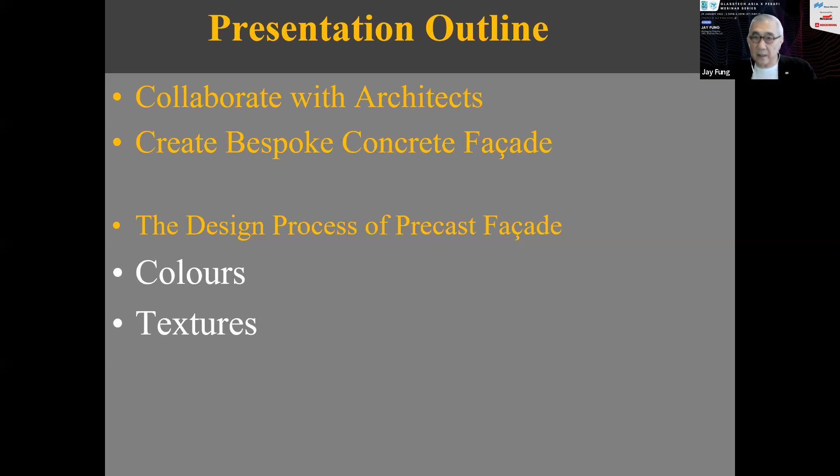Now, very briefly, I will explain the process that I went through in collaborating with the architects and the outcome of this precast concrete facade that is bespoke, and also many of them are iconic. And of course the process that I went through in developing these precast facade panels, and we are focusing on three primary issues. They are the colors of the precast concrete facade, and then the textures. Texture meaning whether they are smooth or rough, or half smooth and half rough, and so on. And of course there is the profile. That means the shape or the form of the concrete panel facade.

I've chosen three projects to share with you. The first one is the Troika. It's a condominium project in Kuala Lumpur, Malaysia, designed by Norman Foster and Partners with the local architect GDP. The second project is in Singapore, the new State Courts, designed by a firm based in UK called Serie, in collaboration with the local architects Multiply and CPG. And the third one, the Hive, in NTU, Nanyang Technological University in Singapore, designed by Thomas Heatherwick of Heatherwick Studio.

And this happens to be, I understand, one of the favorite projects of Timothy. So he makes sure that I focus on this job. So I'll try to do that.

Now, the first job is the Troika in KL. It is a condominium project consisting of 3 towers, each one about 40 to 50 stories high. And our work is used at the shear walls, the black walls here, that you can see from your bedroom. When you sleep, you are next to it, or you can see them in your living room or in the balcony, and also from a distance.

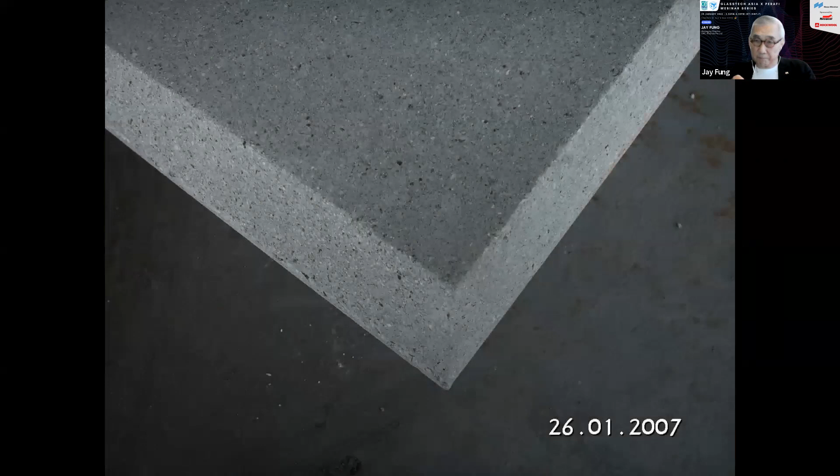Now, this is what one of the panels looks like. It's a precast concrete panel. The natural concrete, there is no paint, there is no skim coat, there is no plastering. This is the honest expression of the concrete. But how we can do this is not so easy. You have to be very clean, and the color has to be very uniform to meet Norman Foster's requirement. I'll try to explain that in the next few slides.

In order to make sure that the color is consistent, because we're not painting the panels, all the raw material has to come from the same source. For instance, the granite aggregates had to come from the same source. You can't use granite from this quarry today and then the next batch from another quarry, because a different material such as the granite or the cement or the sand will alter the color of the concrete panels.

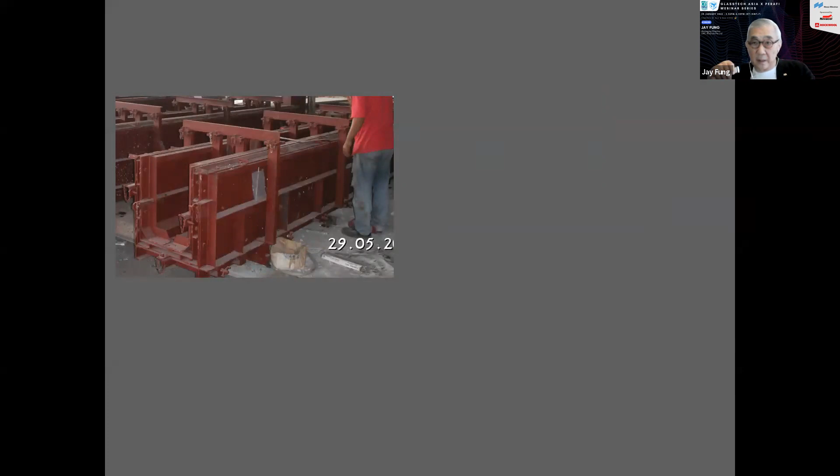And to make the panels, we have the mold. In this case, for this panel, the mold size is 1 meter by 3 meters. And we pour the concrete after we have chosen all the mixes. And then there is a U-shaped panel that is done in this mold. It's made of steel. And these are the panels that are cast from the steel mold. You can see the U-shaped panel on the end, and then the flat panels in the center.

What I want to highlight is that Norman Foster had a very strict requirement on the color, and on the uniformity of the texture. Color-wise, he doesn't allow any black mark, which is natural in concrete, such as an effect like marble. He doesn't allow that. So if you have a black blotch that is bigger than a 50-cent coin, that will be rejected.

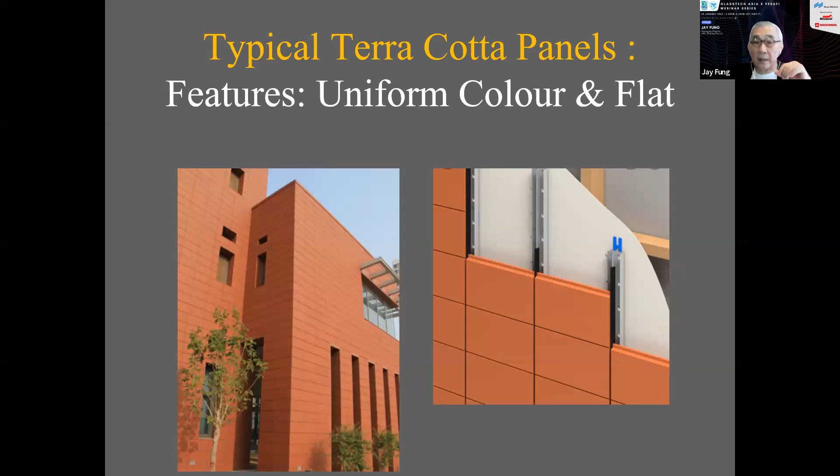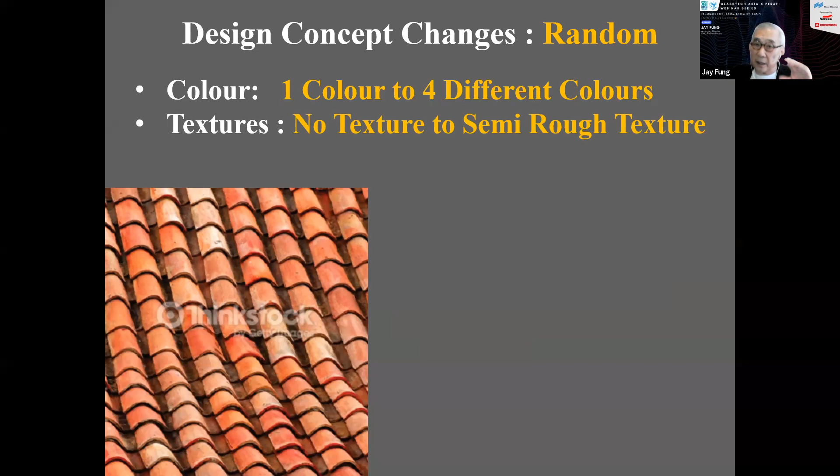So the color has to be 4 different colors, and the texture will be slightly rough. And the profile, meaning the ins and outs, those groove lines have gone from one width to 6 different groove line widths. So when you combine them, it'll be all very random. And throughout the building, they're different. He wanted a different color scheme for different floors. They had chosen 4 different main colors.

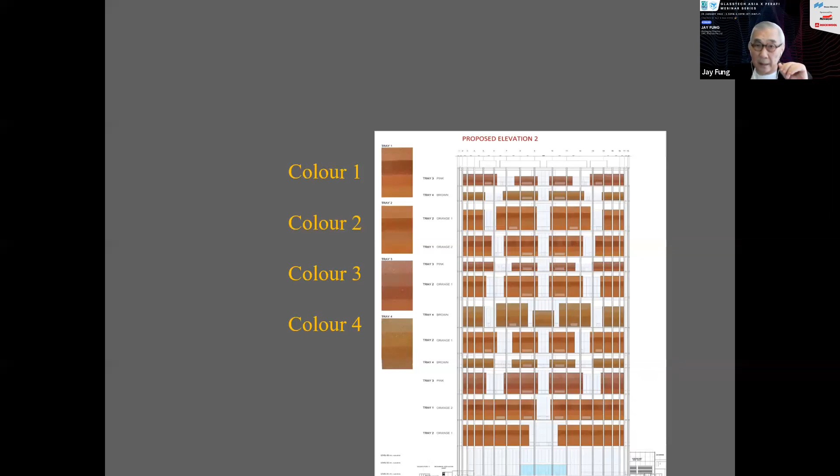For the terracotta, you can see them here. Color 1, 2, 3, 4, and each one of the terracotta colors will consist of 4 different shades of the same color. So altogether, there are 16 shades that we need to do. And it gets to be quite complicated. As you can see, we have to do lots and lots of these small samples for him to choose.

And Chris Lee is based in London, so we have to Skype. This is before COVID and before Zoom. And sometimes we have to use our handphones to take photos and share them. But we soon came to realize iPhone and Samsung phones have different colors, so we all agreed to use only Samsung phones when we share the color, so we can see the same and discuss the color more accurately, because we're talking about very fine distinctions among all the shades of the terracottas.

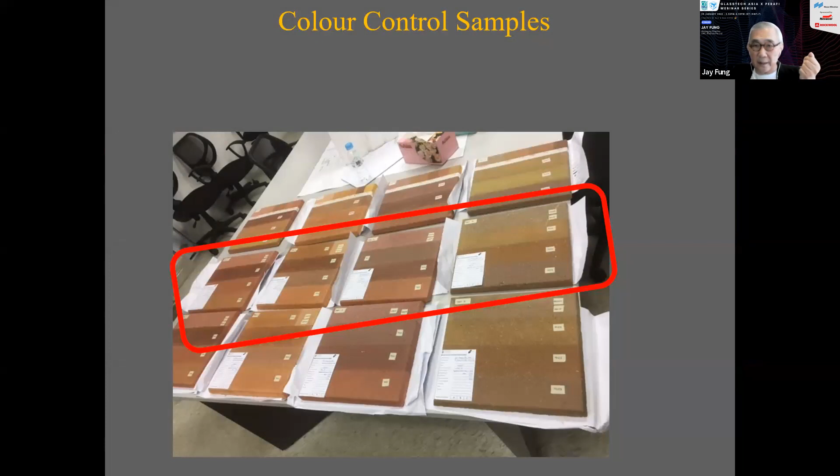And after all these panels that we have cast, we have to do 3 sets of these control samples, 1 to be kept by the main contractor, 1 by us, and 1 by the architect.

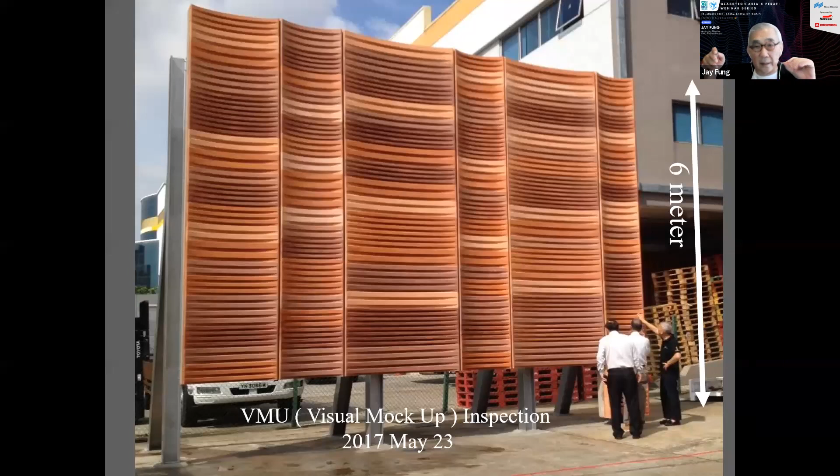And the panels come in 3 widths. The widest one is 1.8 meters, then there's a 1.2 meter wide, and then there's the 900 millimeter wide.

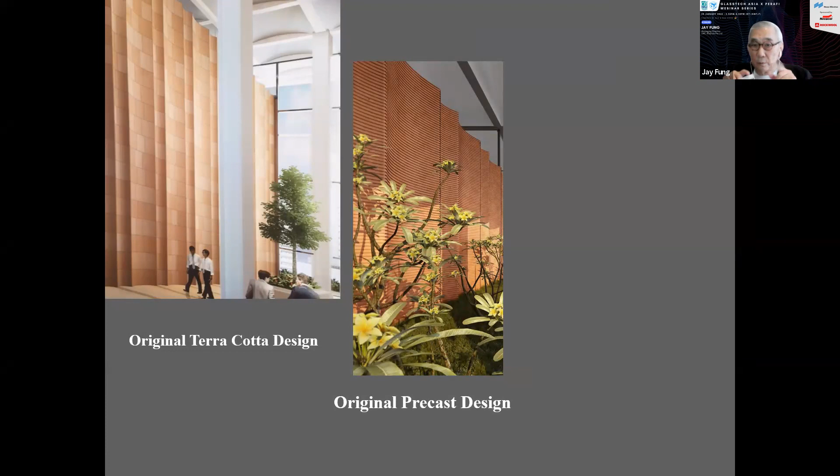So we were able to change from the original terracotta design, a uniform red color, a single color, single groove line precast, to something that is very random and very interesting. And all these design upgrades were done after we got the job. And recently, this project has won an award.

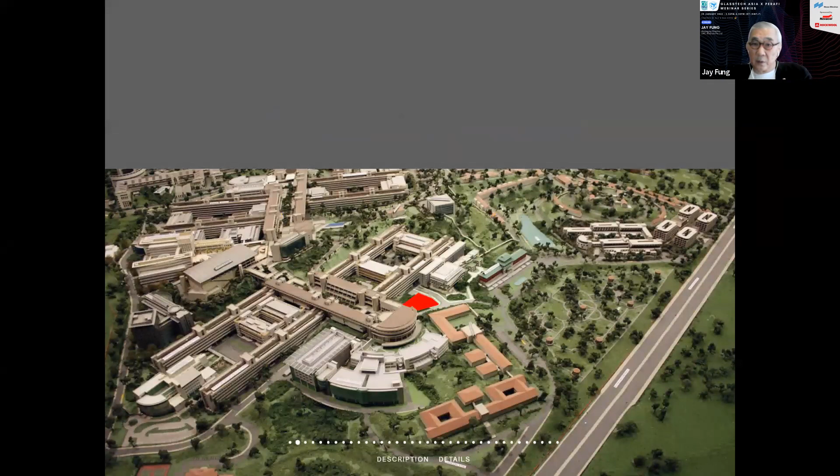Now, before I get to the facade design, the precast design, because this project is so interesting, not just on the facade but also on the layout, the form and the interior, I'd like to spend a few minutes talking about some of the interesting features of this project. Many of these photos are taken from the website of the architect, such as this one. The red spot is the location of the building on campus, and the total build-up is about 14,000 square meters, at a cost of about 45 million Singapore dollars.

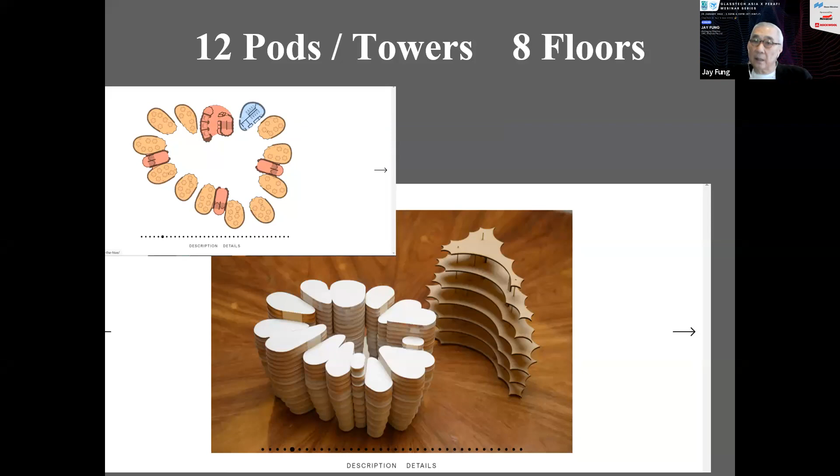Now, $45 million, I was told by the architect, is the cost of a car park structure in Singapore. So in other words, he was working with a very tight budget on this project. So everything that was done for this project, both interior and exterior, is all natural concrete, without any paint or additional claddings. The layout consists of 12 pods, like flower petals. There are 12 of them, and also 12 towers, each tower about 8 floors high.

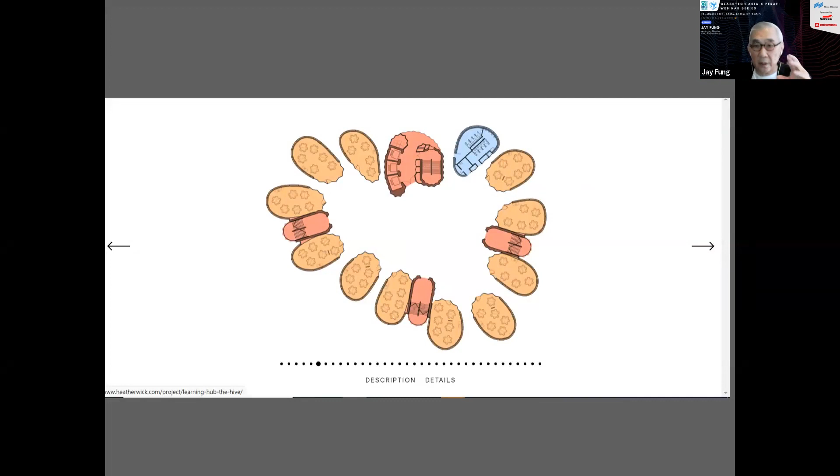In one of the talks by Thomas Heatherwick, he was explaining the concept of the layout. He said in a traditional school, you have a long and narrow corridor, and each room is a squarish room with a lecturer standing in the front and the students all sitting at the back. Now, in his design, he has made all the classrooms like flower-shaped petals, round, very irregular and very organic. This is the interior of the classroom. It's not squarish, it's round, and all the tables and chairs are movable. So there's no front and no back.

And the traditional blackboard is all around the wall of this classroom. The lecturer does not necessarily stand in the front, but she can be anywhere. So this is the new concept of learning, of classroom design. Another feature I heard in his lecture is that they have this corridor that connects all these pods, and the corridors are designed to allow and encourage interactions among the students.

And Thomas Heatherwick said in one of his talks that one of the ministers told him he would like the design to promote and increase the birth rate of Singapore. In other words, getting the boys and girls to meet along the corridor and so on. So, judging from the photos I can see online and all the wedding photos taken here and here, I think Thomas has done a very good job.

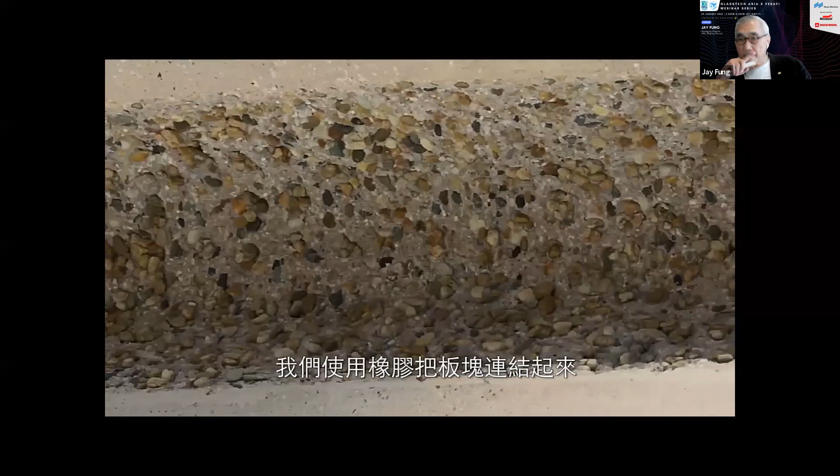Each of these panels is unique, and they were laid out with a series of pieces of rubber that were laid into the formwork. You'll see there's moments of shininess, real sort of roughness that comes about. What we're seeing here is one of the final panels, but you can imagine in getting to this kind of quality and surface, there were countless one-to-one mock-ups that were done to get the exact pigment, get the exact texture that they wanted to refine it.

Now, after I got a job, Thomas and I have changed the facade, and I'll share with you the process that we have gone through. We have changed the colors, we have changed the profile, and we also have changed the textures. Now, on the color, originally he liked something like this. Say, hey Jay, can you do this kind of Corten steel work? I said yes.

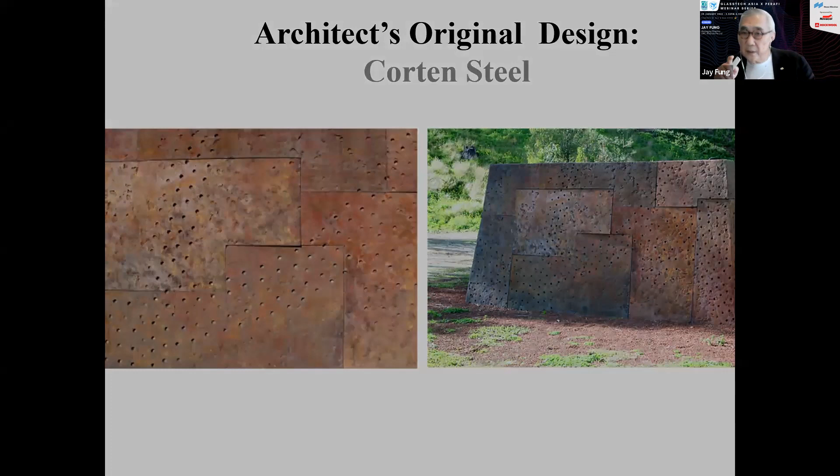So in his rendering, he actually got this design shown. But now, however, it looked like this. So I got my artist to Photoshop. Now how it became from this design to that, I will try to explain. Thomas saw a few samples that I did, and he liked these two. But he said, Jay, can you make this gray a bit more beige, the one on the left? Or can you make this beige a little bit more gray?

I said, sure. He comes to Singapore maybe once every month or once every 2 months. So I must get the color right. Each time I must get the design change right. Otherwise, the process would take a long time. Here you have the most gray, and here you have the most pink. And he chose the most pink. And this is the color that he's chosen.

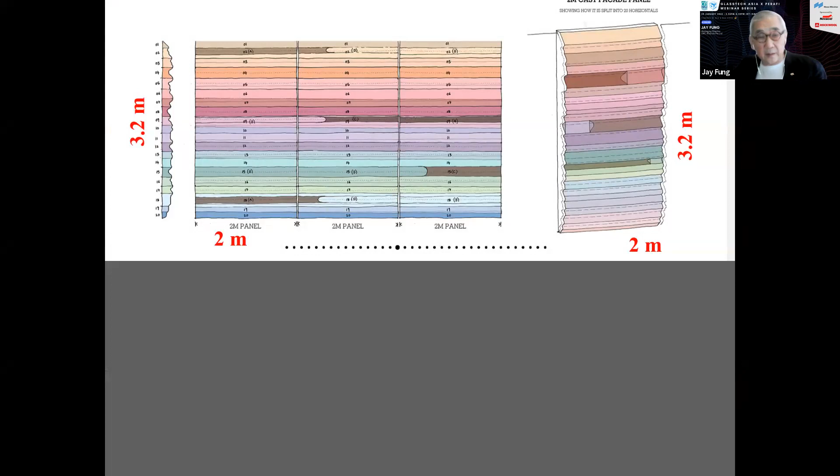Now, the profile, he sent me this photo. This is the job that he liked, the Perot Museum of Nature and Science in the US. He said, Jay, can you do this? He liked this. Every panel is unique. And all these joints, they are not vertical, they are sloped. I said, yes. So he changed his profile to something like this. It's all curvy, all wavy, and each one is about 3.2 meters tall and 2 meters wide.

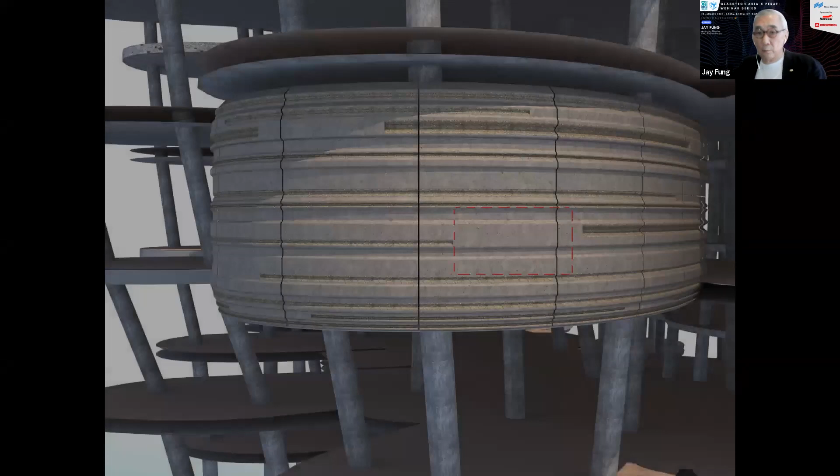Now the next thing is that we look at the textures. There are two different textures, rough and smooth, on each panel. The recessed, curved, darker part is the rough texture, and the lighter one is smooth. And then he sent me this rendering with this detail blow up. When I looked at this, I said, oh no, because you can see that the color here is quite random and looks like a stone, and it has all the pixels. Now, the ones that I did were very uniform. So from a distance, the one I showed him, which he approved, would look very flat, would look like paint. It wouldn't look like this.

So when I explained to him, next time over a cup of coffee, he said, Jay, this is what I want to do. He was sketching his design on this packet of sugar. So I pretended that I understood. And the next time he came, I showed him a lot of samples, some new, some from my factory done in the past. From that, I picked about 10 panels. I said, Thomas, if we were to combine all these panels, we probably can achieve the effect that you were looking for. So that's the color.

And then I'm trying to do these voids and holes like a natural travertine. How I did it was I stole this packet of Himalayan rock salt from my wife's kitchen. I pour this salt onto the mold, and I pour the concrete. After the concrete is dry, I wash with water to dissolve and remove all the rock salt. So I get these holes. Of course, for my actual project, I have to use garam kasar, which is a lot cheaper than the Himalayan rock salt that I used for the sample.

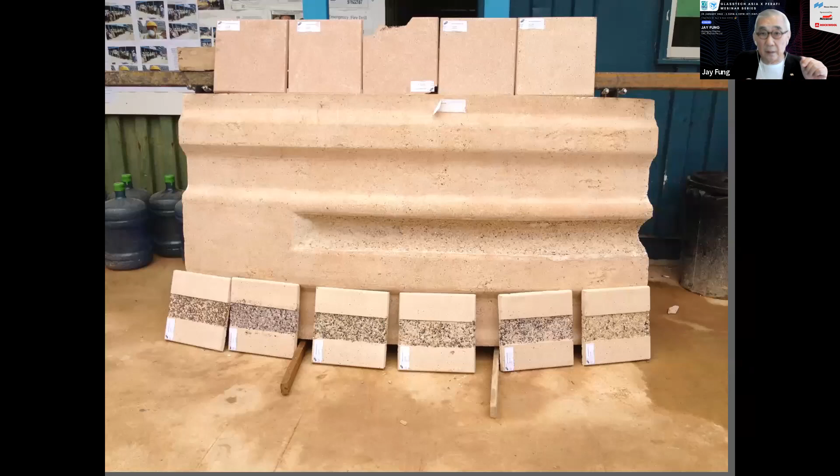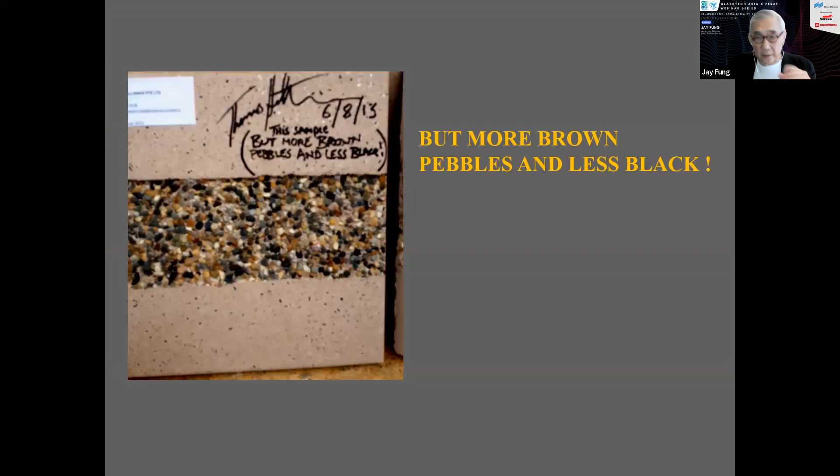And with that, we did all the small panels from lighter to darker, and then he chose the one that is most dark. And for the recessed part, the color and texture, he has chosen the one that is the most dark. But he has one more comment: more brown pebbles and less black. So with that, we were able to do the VMU, the first panel for him to review.

So he looked at it up close, and actually, when you come to look at it, the color is very similar to the image that he has shown me before. And then he stood from a distance and viewed it, and then he approved it, signed it off, and we have to produce them, and we install them by mobile crane. And this is the fixing method. You have 2 points that sit on the slab, and then you have 2 points that are held at the top for restraint.

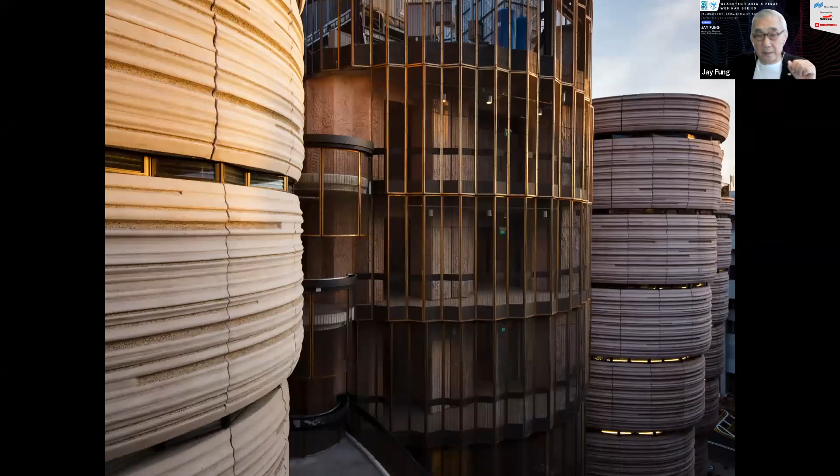And this is the finished project. What I wish to highlight is about 1,000 over pieces, and each piece is unique. Every panel is unique, and this makes our work very complicated. But because of this richness and combination, it makes this project very interesting. So here it is, the final project, the final photo of this project.

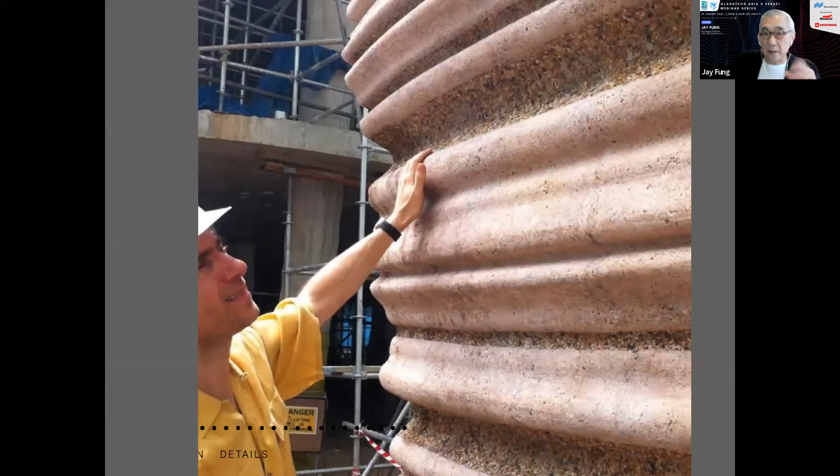I once asked Thomas, what is your favorite project? He said, oh, it's NTU. That was in 2015. He said, this is my first completed project. In the past, his projects were all bridges and the UK hall in the Expo. This is his first permanent project. But he said, I also like it because it looks like Japanese pottery. As you know, Thomas Heatherwick is not trained as an architect. He was trained as an artist. So he likes the handmade quality of this project.

And his work has been shown around the world, including here in Singapore and in the US. Proud to say that my panel sits right in front of the London bus that he has designed, right in the museum. So I'm very proud that my concrete panel is actually shown in the museum. And he also used this design for the book cover, and obviously he quite liked my work. So with this beautiful photo with the beautiful panels, I would like to end my talk. Thank you very much, and over to you, Sarah.

Thank you so much, Jay. Thank you for the wonderfully inspiring presentation. It has really opened our eyes to the vast possibilities in concrete. I think it was so interesting how you had to really think out of the box, like even use salt and baking soda. That was really cool. And hopefully all of us will now have more ideas in terms of how to integrate glass and metal with concrete. I hope we'll see more of that in the future as well. So in the interest of time, we're going to move on to our next speaker.

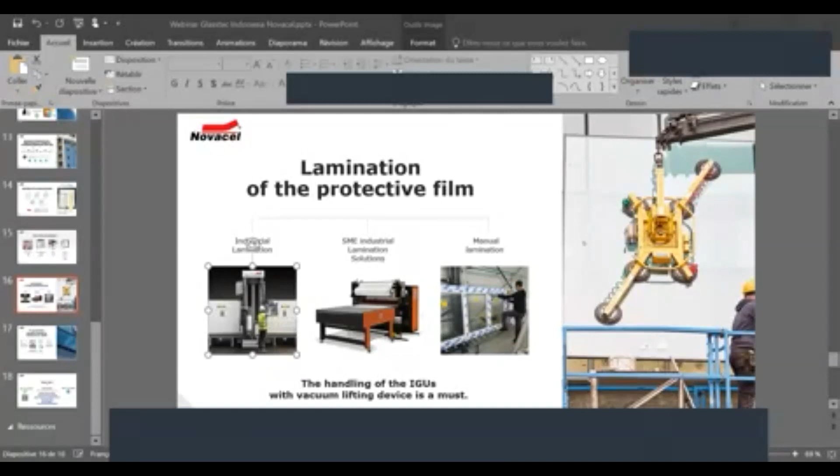We would like to welcome Ms. Sandrine Guibert, Head of Glass Market from Novacel, who will be speaking on the benefits of temporary protective film for glass facades. Ms. Sandrine has been working at Novacel since 2007, beginning as a marketing product manager. Today, she is the head of Glass Market with experience in developing protection solutions for the glass market and providing worldwide support for sales and customers. Sandrine is in charge of the development of green protection solutions for all surfaces, and she holds a diploma in chemistry and a master's diploma in business. Ms. Sandrine, please share with us your presentation.

Thank you, Sarah, for your introduction. Can you hear me clearly? Yes. Thank you. Let me share with you my presentation. One moment, please. Can you see my presentation clearly right now? Yes, there is a little box on the bottom. Still this little box. Is it better like this? It's on top. A moment, please.

All right, I think this is okay right now. The box is right in the middle. Okay, this is good. Yeah.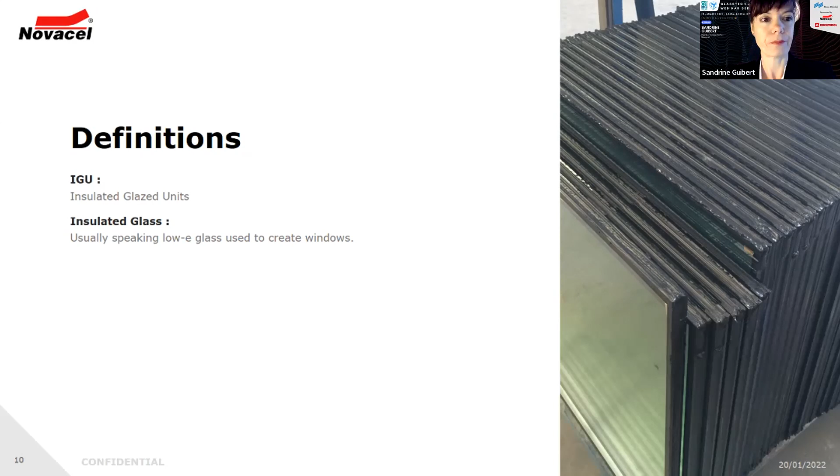The protection of IGUs can be done as soon as they are produced in the factory. Then the protected modules will be installed in the window profiles at the window manufacturers or directly on the facade. Windows are among the first elements installed in the new building, protecting it from the outdoor environment. For that reason, glass is very sensitive to damage during the remaining construction work, which may take months.

Protective film is an amazing shield against all types of environmental attacks that glass can face during the construction. For instance, cement projections, paint projections, silicone, grinding sparks, and more. Thanks to protection films, no more cleaning or replacing of IGUs is needed at the end at the construction site. No more late fees or penalties and no more disputes between glass installers and customers. Customers are more satisfied and returns are almost non-existent.

That's why building producers, architects, window manufacturers, IGU manufacturers are very interested in using this kind of product because it reduces construction time and enables them to deliver a clean building. Usually speaking, IGUs are protected in the factory by IGU producers at the end of the fabrication. Films can also be installed by window manufacturers, sometimes directly on site.

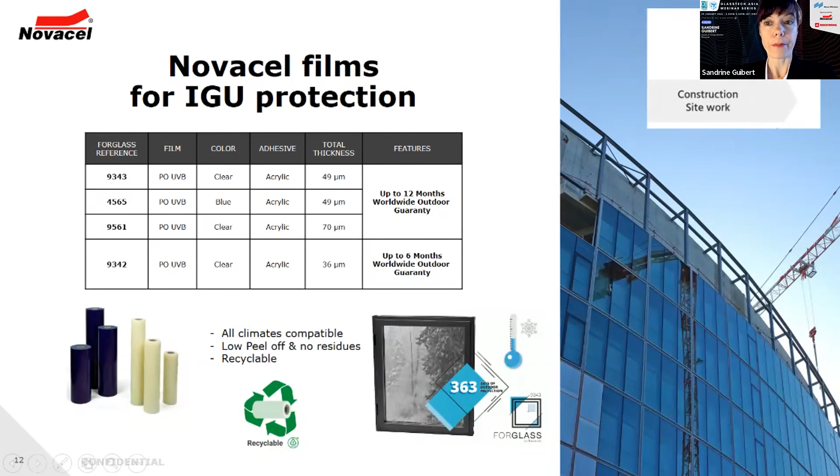To sum up, Novacel protective films are a safe solution to preserve insulating glazing all the way. Since films are installed from the beginning of the fabrication of the IGU, glass is protected all the way from the fabrication to the end of the construction work, going through assembly into the carpentry at the carpentry factory. They also sustain joinery installation and transportation. Our films are resistant to scratches, adhesives, cement, paint, and grinding injuries.

They are all climate compatible. They sustain warmth and humidity. They allow daylight penetration into the building. It's possible to use the same film for inside and outside use. No need to change the film. They can be removed from the surfaces easily without leaving any residues. And they can stay on the glass for 1 year.

So the benefits of protecting IGUs are numerous. Less replacement of damaged glazing at the end of the construction, fewer disputes between window installers or glass facades and customers. They allow considerable time and money savings, and they guarantee customer satisfaction. This is very, very important.

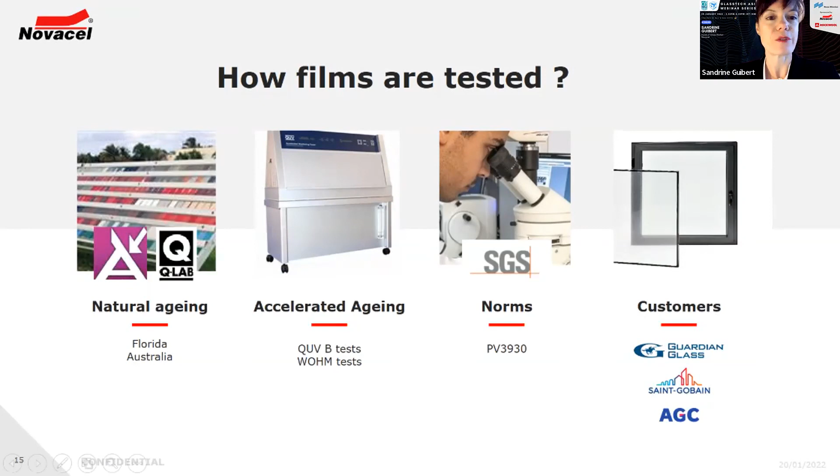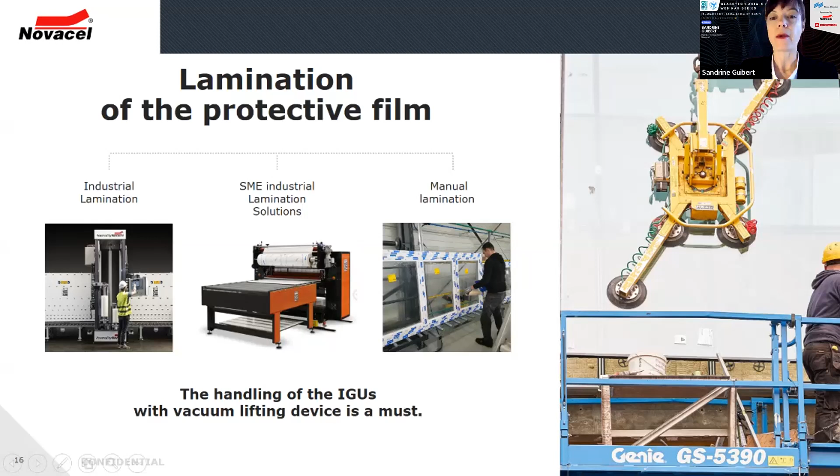And soon we will launch a new protective film made with 20% of recycled content for the protection of IGUs. This will belong to the Oxygen range, the new eco-responsible range from Novacel.

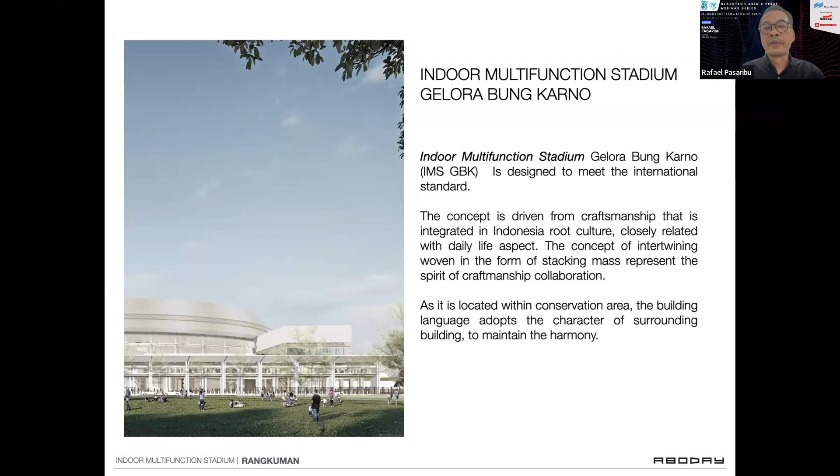What we have right now, the building will be on the northwest of the main stadium. We have a lot of facilities after the 18th Asian Games and the last renovations. But basically, this is the only structure that is allowed based on the consensus given by many stakeholders.

This is the first story plan. FIBA, as with other stadiums that are designed, usually has very strict zones. On the left side is services and also the parking area for the athletes, and the lower part where we see the orange color is for the public. It's an open plaza, where we have on the left and right escalators that lead people to the lobby and the second floor,

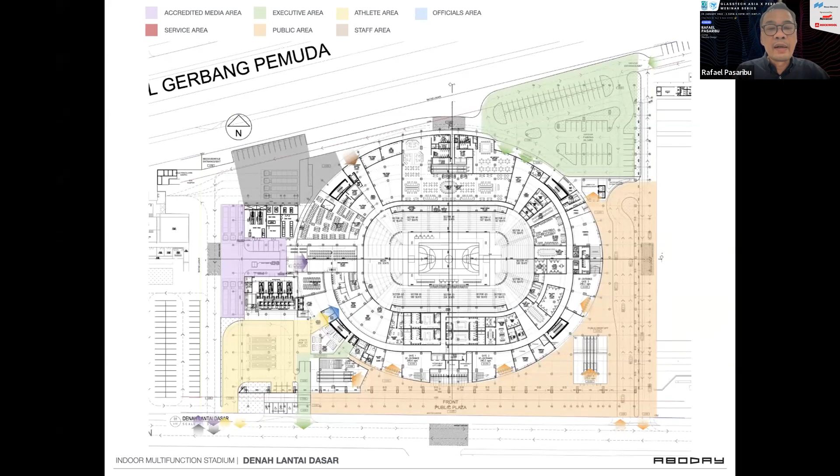and the green area is for the executive parking. Whatever event supporting facilities will be hosted at the ground floor, including the media, changing rooms, and so on, along with the official rooms and executive lounge. Inside, the red color represents the MEP equipment, and this is the supporting facilities for the playing field. We designed this with consideration that not only basketball is hosted, but also ice hockey and other indoor sports.

Second floor, where the tribune starts. Part of the tribune is accessed from the second floor, going into the first story, where it is retractable, telescopic seating. Others are a corridor at the perimeter ring, and from the corridors we enter the tribunes. We have two training fields on the left side, the commercial in blue on the right side, and the orange color is where the public will access the internal corridors.

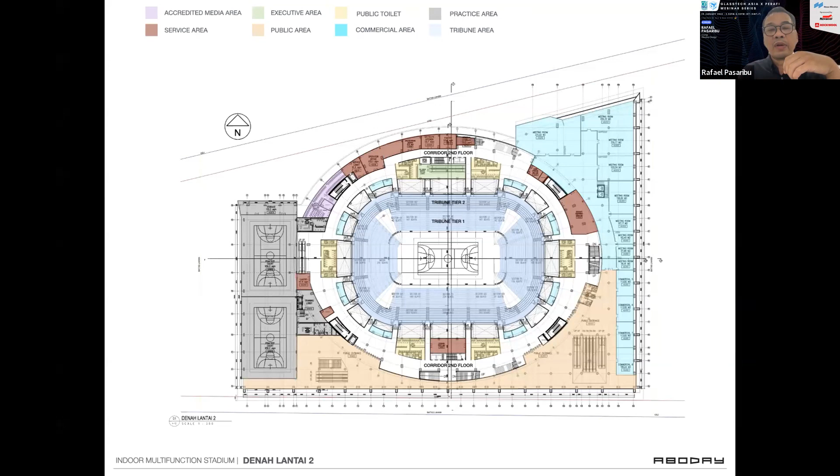From our ongoing discussion with the appointed consultants, there are some changes in this drawing to the lift core and the staircase core. This is the third floor, where we have the executive box. Executives, the presidents and so on, will stay on the third floor, and the circulation of the third floor will be isolated from public access as part of the requirements.

This is the fourth story, where we can see additional massings on the left and right that act as a place for MEP equipment. And this is the top, and the number of tribunes. This is the building from the north and south. The north facade will face the national broadcast television, and the south elevation we can see from the main stadium. They're two different things, because people will be coming from the south.

On the south elevation, the podium needs to tie back with the surrounding characters. And the top, we have two options for the finishes. One is aluminum panels, not aluminum composite panel, and the other is a stretch membrane, some of which come from brands like Serge Ferrari, a translucent material that allows vision from inside to outside.

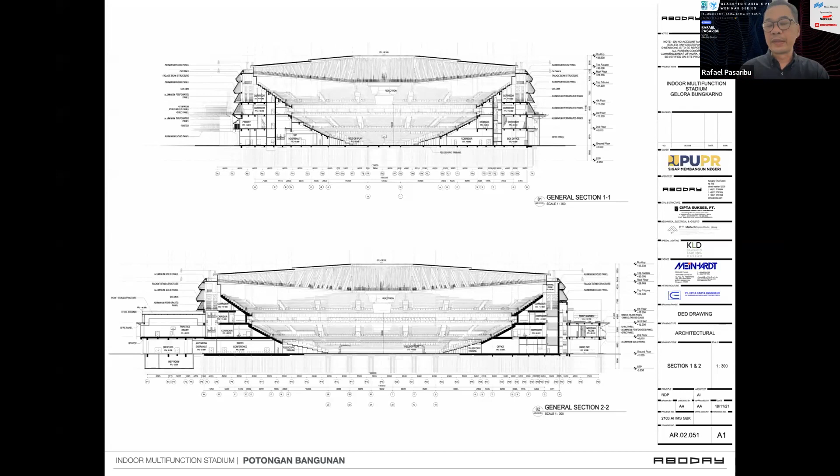So the main stadium perimeter height is about 36. We are pushed to 30 on the eave of the roof. That basically is controlled by the government. Okay, so if we see this one, how the building works is quite straightforward.

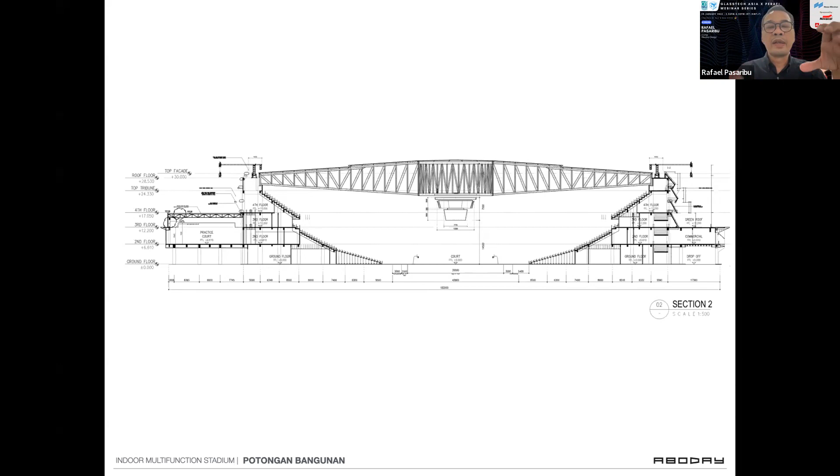Compared with other 16,000 capacity stadiums alike, this is the most compact footprint ever, because we are about 15,000 square meters GFA. Others start at least at 70,000 square meters and beyond. We are constrained by the size of the location. That's why this is very compact. And whatever we put here, we still try to adhere to the international standard given by FIBA.

So this is the skin section, which allows maintenance access at every skin level for easy maintenance. We still provide access from the top for gondolas, but prefer to have access at every level of panels. Okay, so this is a more detailed section of how this elevation and its panels work out.

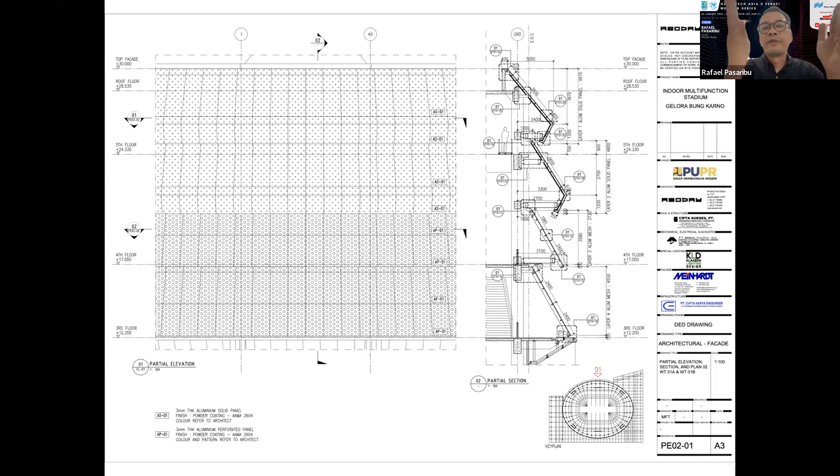We work with Meinhardt as our facade consultants. That's why the idea is not to use composite panel, but aluminum panel itself directly. So it needs to be sourced from the suppliers, and there are benefits given by the aluminum panels. Notably, we had an incident in Jakarta whereby one of the government buildings had a fire, and some of it was contributed by the use of aluminum composite panel, non-fire rated materials. So we try to avoid that, because the authority asks us to really be concerned about selection of materials. So that is one constraint that we have here.

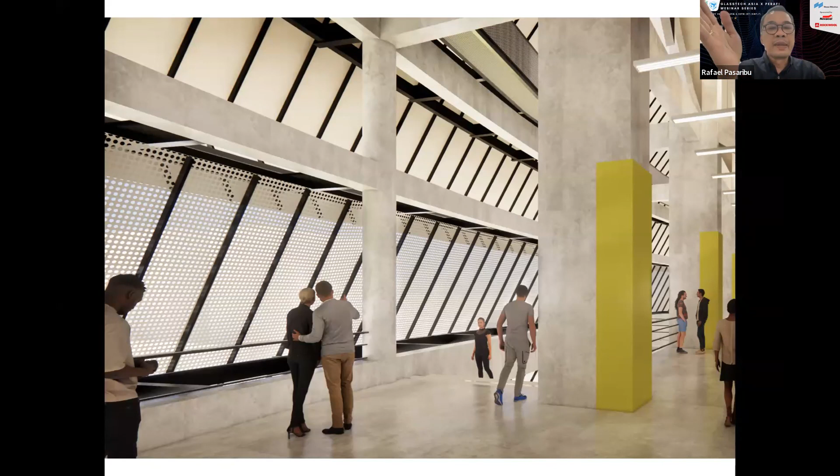Basically, the sports complex officials required us to create a building that is zero maintenance. We said there's no building which is zero maintenance, but minimum maintenance, yes, because zero maintenance means you don't come up with a budget to maintain the building, which is a big question. None of the materials in Jakarta that I know, even glass, after several years, because they don't provide coatings, some stains happen because of lack of maintenance. So maintenance is still required for these buildings.

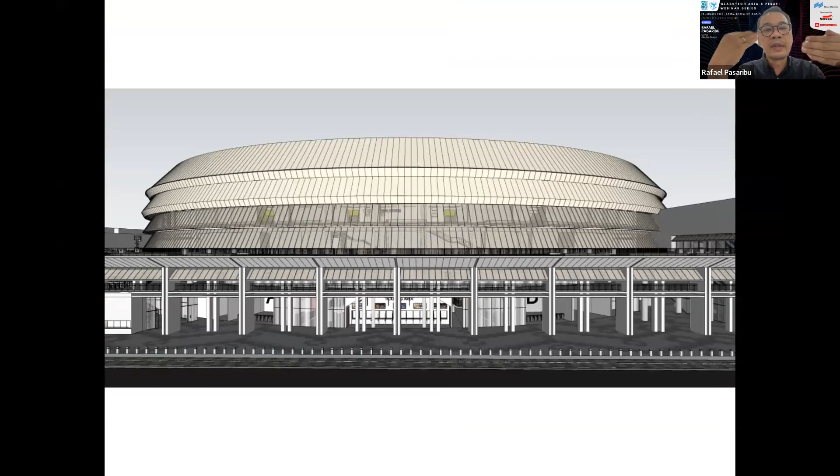Some other views of other areas. So we basically take out any unnecessary construction, just leaving the bare essentials for the building to perform. This is a zoom; you can see the scale of the panels compared to the person sitting there. In the elevations, in real use, we can still see the structure behind the screen. But for the top two, we use solid panels instead of screen, because there's no necessity to provide cross ventilation at the top, since it's part of the utilities.

Some view below, you can see the structures that come from the existing building. So those are basically the contributors to what we have. We had a very modern approach in the beginning with some free structures, columns, metals, but then we were challenged by the heritage authority, and if we don't get their approval, the building cannot go to the construction stage. So we have very interesting characters from the existing building, but not everything can be replicated. So we just borrow the column characters and so on here.

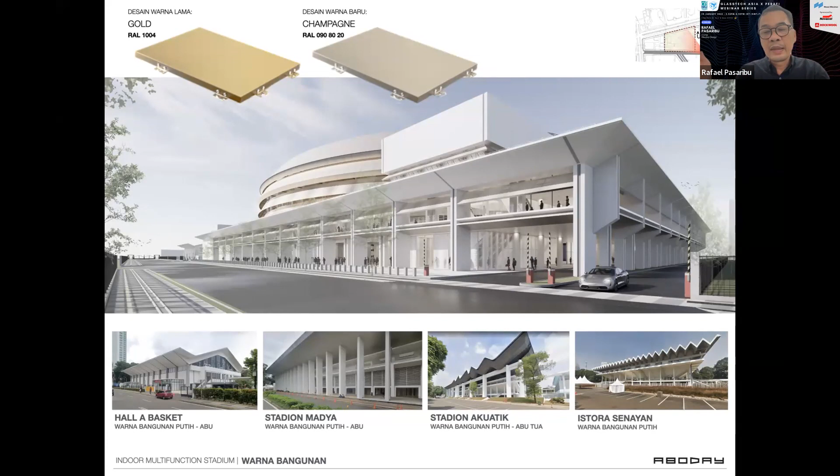The panel colors that we choose are also controlled. But we insisted on having the champagne gold colors as an accent to the narration that we built, that this is craftsmanship with bamboo-colored things in wood, and that also makes a statement that this is the first building constructed after several years, part of the modern character injected into this area.

Other than aluminum panel, we also use the louvers. The louvers are basically also provided by the next door facilities. So I think it's best to make them part of the building too, but only a slight part, because the rest is very much controlled by the aluminum panels and glass.

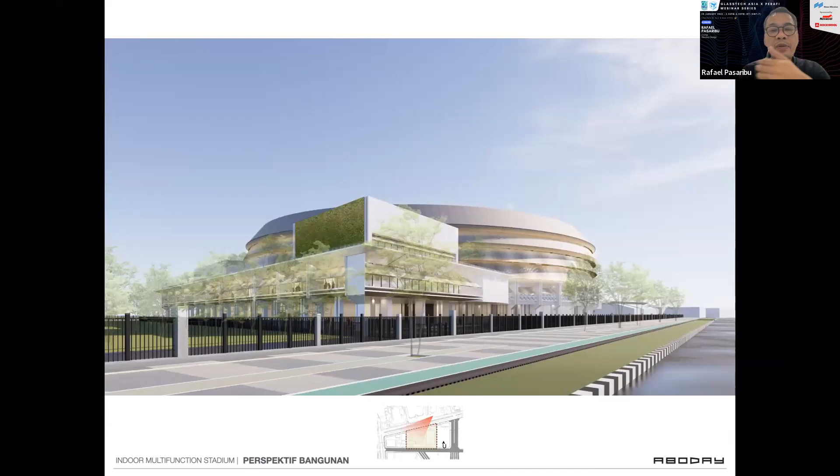Okay, this is the view from the south. Okay, this is from the main road. Some features like a green wall and so on are introduced here. Formerly, they wanted something more commercially oriented, just like a billboard, but then heritage also thinks that may jeopardize the whole mood of the area.

We insisted on taking out the fence, because we feel that this should be a permeable space. People are invited, but then there are some security concerns, so that's why they still want to retain the fence here.

Yeah, the view towards the main stadium. Some areas on the roof are required to be green, or to be a facility that comes with green. So basically we introduce the commercial area at the rooftop, so people can go around and enjoy the greenery that is provided.

If this is just greenery, I don't think people will come up to this level and do something. But if there's a sense of destination, we create a hall at the third floor here on the far right. That basically makes people want to go up during an event.

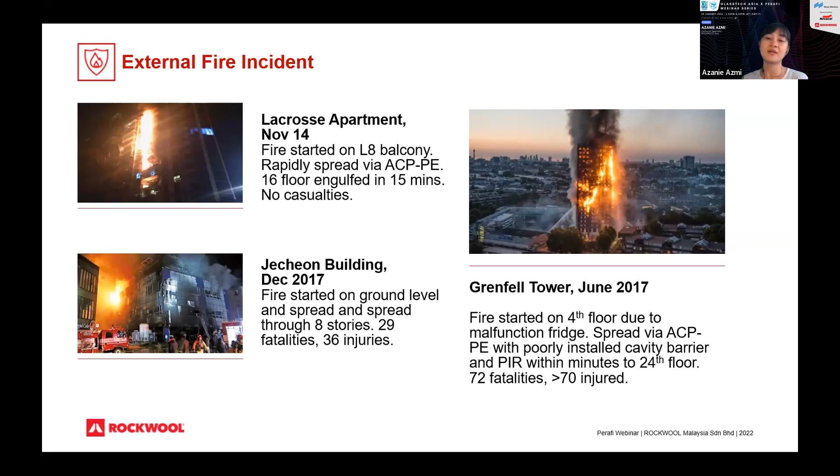So external fire, when it happens, will have a devastating effect on life, not to mention the property damage. So roughly, let's look at how external fire spreads. Fire can happen in one of the stories of a multi-story building, and it can spread externally due to combustible cladding to the other stories and cause secondary fires. And if there is a cavity behind that cladding, the fire can accelerate and extend 5 or 10 times the original due to this cavity.

A lot of facade cladding materials are commonly used. I think everyone knows ACP, aluminum composite panel, or ACM as others call it, which sometimes has combustible material as the core. However, there is also an A2 version. A2 is a classification under the European code meaning the product is of limited combustibility. There is HPL, high pressure laminate, which is layered wood and paper fiber and is a combustible material, fiber cement, or even stone wool cladding.

Do note that stone wool cladding is different from the stone wool insulation that we have. It's kind of like fiber cement, but compressed, where the main ingredient is still stone wool. Under our Rockwool International Group, we have this product called Rockpanel. So ACP panels are commonly used, especially those with a combustible core. Under some fire regulations, when they test the ACP panel, they only require the sample to be subjected to radiant heat.

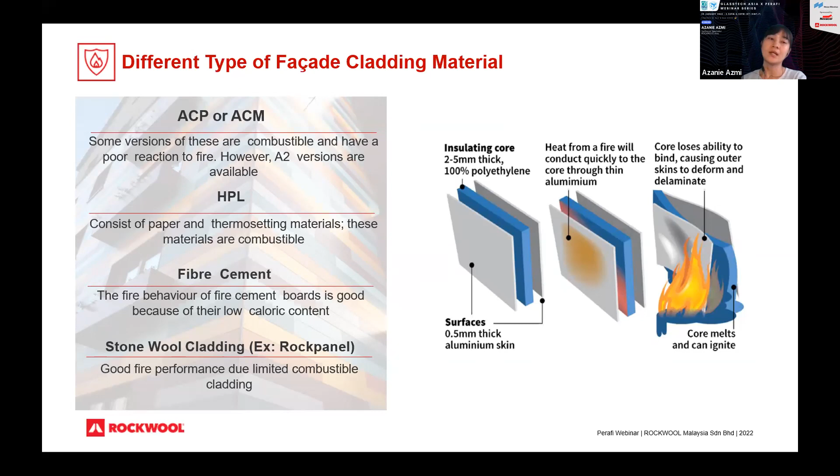Okay, so that's where you may want to actually start when it comes to designing the external cladding. What are the materials that you want to choose that can have good fire safety? So here I want to go through countries which have fire safety requirements for the external wall. Let's look first at Malaysia.

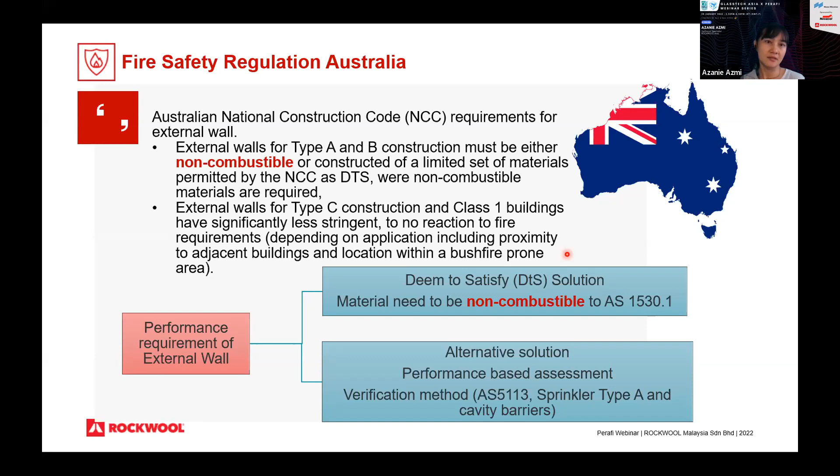In this test, they constructed 7 full-scale samples, 8 meters high. 2 of the samples used stone wool insulation, 3 used PIR polyiso, and 2 used phenolic foam. If you look at the reaction to fire performance of these 3, stone wool is A1, the highest classification, while PIR and phenolic foam are combustible materials, classified only as B as well as E.

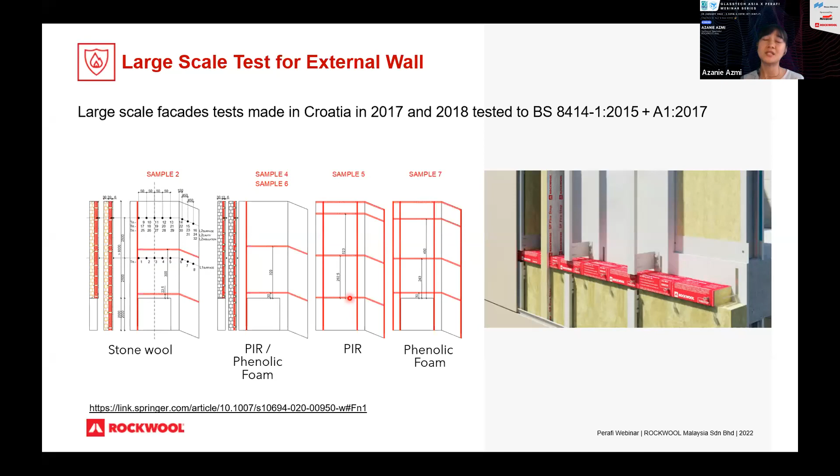So just a little bit at the end of the test, because the test was done for 60 minutes, a picture of how it looks. The first 2 are the stone wool insulations. You can see that the stone wool insulation is still intact, while the rest are already burnt.

I keep mentioning the word combustibility. So what does it mean? Combustibility is a measure of how easily a substance bursts into flame through fire or combustion. Different countries define test methods for combustibility with their own codes, but mostly follow almost the same test method. In this case, I want to highlight the European code, which follows EN 13501-1.

When you test a building material to this non-combustibility test, it states that your material does not ignite, does not cause flame to spread, has very little heat emission, very little or no smoke or toxic gas emission, and no character change: melting, dripping, charring. What does character change mean? For example, melting or dripping in a fire can cause it to spread to other materials inside that room.

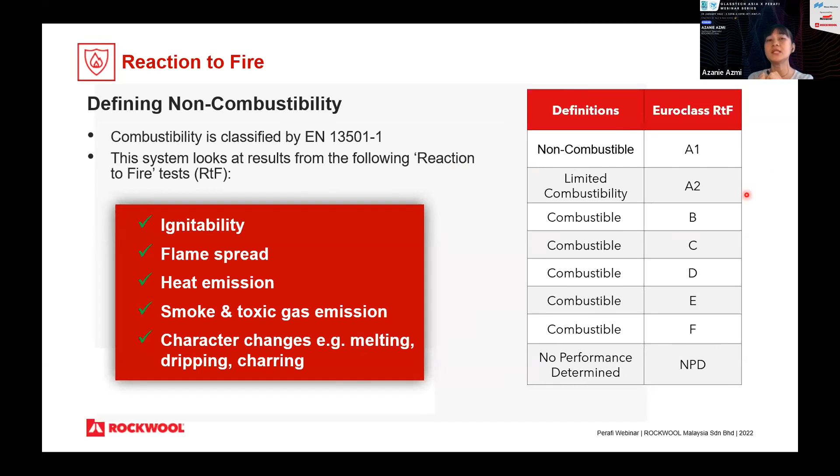Under the EN classification, there are classes A to F. A1 is the highest classification, A2 is limited combustibility, whereas B to F are combustible materials. Comparing stone wool to other types of insulation for reaction to fire, we are A1, whereas generic foams like EPS are around E to F, very combustible, PIR around B to D, and XPS around E to F.

Another thing I want to highlight in terms of fire performance is another test we call heat of combustion. It measures the energy value of fuel that contributes to fire, in megajoules per kg. Here I want to highlight gasoline. Gasoline is highly flammable and has a very high calorific value that adds fuel to the fire.

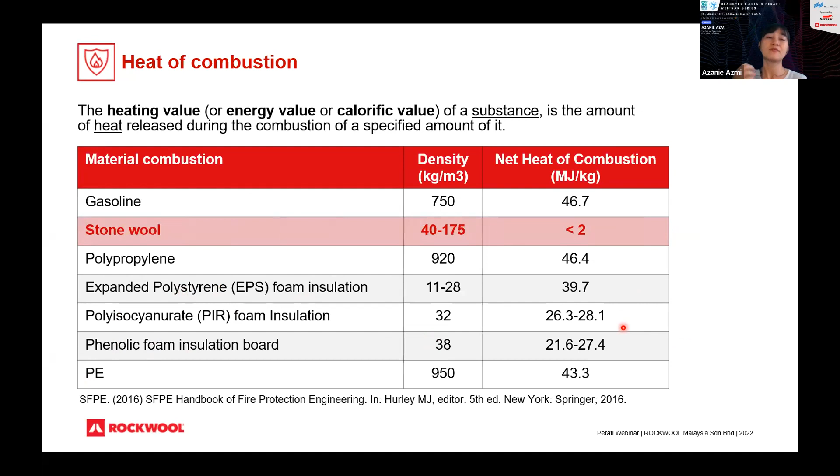Gasoline is roughly 46.7 megajoules per kg. And you see here the other foam insulations are also very high, almost similar to gasoline. For example, EPS is around 39, PIR around half of it, usually around 26 to 28 megajoules per kg. Whereas our stone wool is very low. It contributes very little to fueling the fire, less than 2 megajoules per kg.

Another thing we want to highlight is the melting point. The melting point is where the material starts to change its state from solid to liquid.

If you have a material or any insulation with a very low melting point, it can cause the fire to actually spread from external to internal. Our stone wool has a very high melting point of above 1000 degrees C, compared, for example, to foam insulation, which is around 200 degrees C. That's the reason why, in terms of fire resistance requirements for insulation, they will choose stone wool insulation, because it's able to prevent the heat transmitting to the opposite side.

Now, we look into the evidence base, okay? Stone wool actually does not contribute to fire because, as I mentioned, of its high melting point; it is very stable at very high temperature. It is non-combustible to EN 13501-1, does not burn, has zero flame potential and very little smoke development, and does not emit toxic smoke.

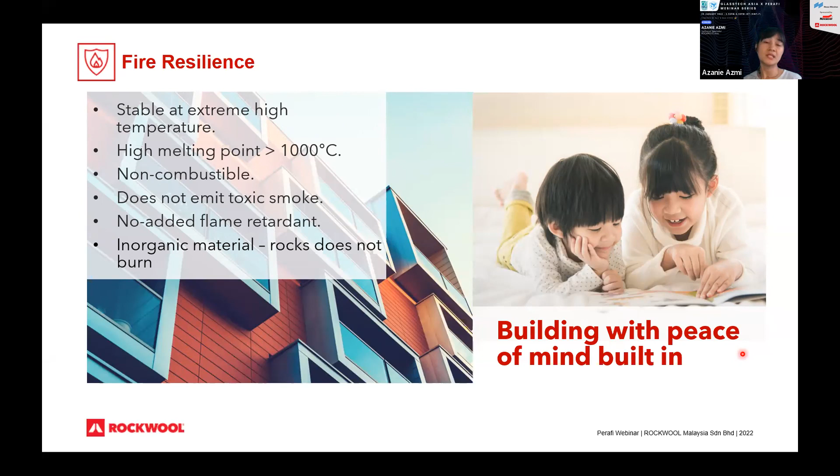We have no flame retardants, okay? Some materials add a layer of flame retardant to prevent the spread of fire, but the material itself is still combustible. So actually the one that provides the fire performance is the stone itself. It gives the fire resilient property.

In terms of what solutions we can apply for external walls using stone wool insulation: it can be ETICS, it can be insulation at the back of any cladding, okay? And here it is actually for curtain wall insulation.

Okay, so how to choose the right insulation? How do you prioritize in terms of fire safety? Choose insulation which is non-combustible, which has a high melting point, which does not have significant smoke emission or release toxic gases, no melting droplets, no significant toxic products. With that, I end my presentation.